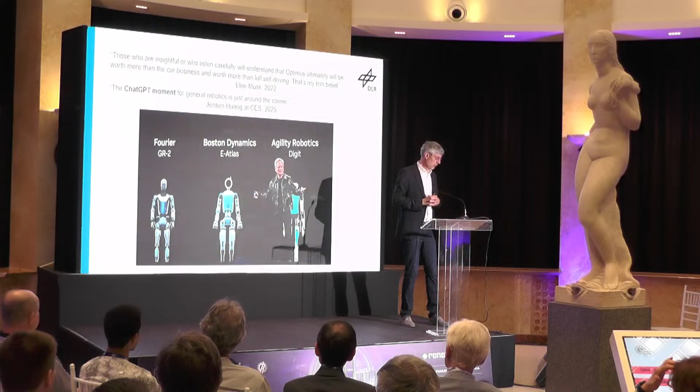And we all know it's much more difficult to act in the real world than acting on text from the internet. There are several citations, and probably the most important was Elon Musk's comment in 2022, where he said that, in principle, with humanoid robotics, Tesla will make more money than with cars and with autonomous driving. Now you could ask, is it a way of sustaining stock exchange value, which is overrated for a company, or does he really believe it? But he did make big changes.

Or the ChatGPT moment is coming. Some people talk about an iPhone moment. So what they are talking about is that robotics is going to be ubiquitous, and as smartphones became a commodity for everyone in the early 2000s, these kinds of robots would come in a similar way. And we can imagine that this will be a bigger disruption than smartphones and a bigger disruption than ChatGPT, if the numbers they are talking about turn out to be true.

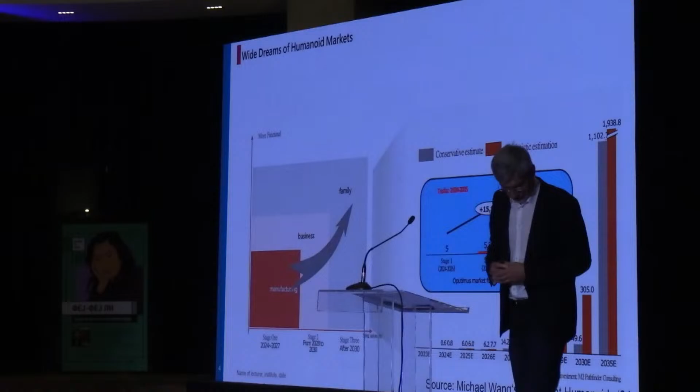This is a statistic again, these are two or three slides I have borrowed from Michael Wang's plenary on humanoids, because he has such a beautiful plenary about humanoids in China. But I don't know if you see it well, maybe I'm standing in the way, maybe I'll go to the side a little bit, but you see the forecast is, of course, overly optimistic.

They say we start with manufacturing, then go to business and family in the 30s. So it's like every one of us at home will have a humanoid robot in the 30s. We all know it's very optimistic. It's not true, to be honest, right?

And then they are talking about this kind of numbers. If I read them correctly, they are talking about selling 10 billion humanoid robots by 2035. I mean, it's a crazy number, right? But if journalists read that, they say, should I believe it or not? Is it true or not?

And they come and ask us, right? And of course, they are exaggerated, but on the other side, there's so much money in the system. I mean, after Elon Musk said something like that - he did reusable launches, all these satellites, he did PayPal, he did Tesla, establishing a market for electric and autonomous driving - and very often the Chinese just followed and did it cheaper, right?

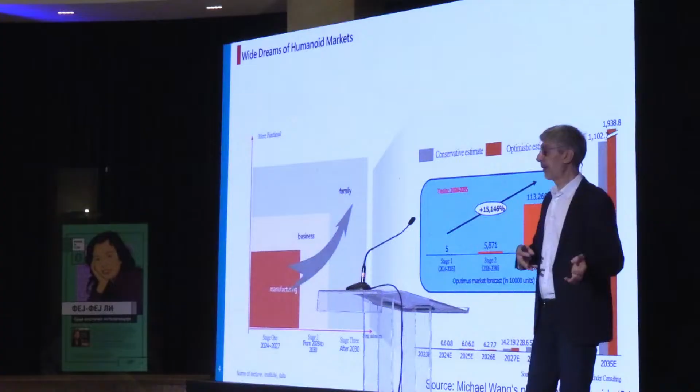And that's what the Chinese said this time: Okay, Elon Musk is going to do a mass market on humanoid robotics, we are going to follow and do it cheaper. And they have in China 4 areas where they announced to invest 140 billion euro just in humanoid robotics in the next 10 years.

I don't know if those numbers are true or exaggerated, but when you speak to Chinese colleagues, they say, if you know how to spell out humanoids and have a company, you can go to government and take millions of dollars for investing in humanoid robotics.

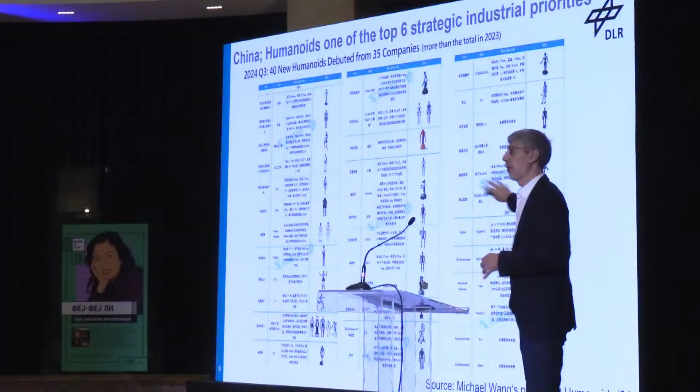And this led to more than 100 companies doing humanoid robots just in China. I think this number is already old, but at the time, beginning of the year, there were like 120, 130 companies doing humanoid robots with no market yet, right?

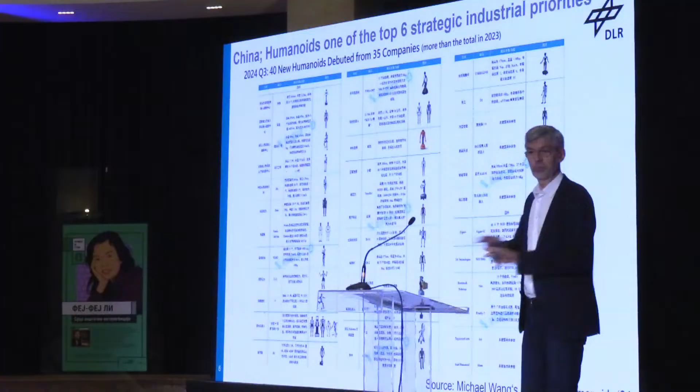Have you seen any humanoid robot in a factory? I haven't, right? But you have 130 companies with a lot of investment, and you have seen the YouTube videos, which are impressive. So what are we doing in Europe about that, right?

So robotics used to be - if you look at KUKA, ABB, FANUC - they sold maybe 30,000, 40,000 robots per year, which is still moderate for scaling, right? If you talk about 10 billion robots, even about 1 million robots per year, you have completely different production methodologies. We all know about smartphones, how integrated they are because they sell hundreds of millions per year.

So can we imagine a robotics industry exploding like this and going into the billions? This is what they are talking about, right? And what are we doing in Europe, right?

We don't have the private money of Elon Musk or American investors. We don't have the governmental support from China. We have small things, but still some things, right?

So Costa mentioned, I'm a coordinator of a network of robotics of which some of you are partners - colleagues from Ljubljana, IIT is part of it, several colleagues, right? So we try to put together 31 partners from some of the best labs, and then we have cascade funding, and I'm very happy that in the cascade funding we have all also Eastern European countries.

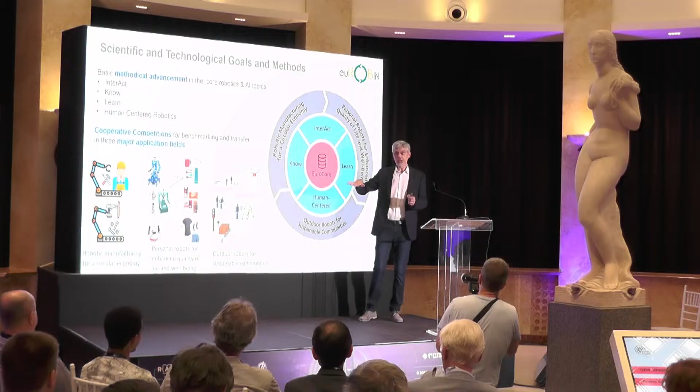And we said from a network of humans to a network of robots. So we have plenty of cool robots in Europe, but no lab is big enough to solve all the problems alone. So the mantra of this project is transferability, and we have also a lot of cascade funding projects. With this transferability, we hope to bring everyone further.

Every year we have some networks with interactions, plenaries like this one, but also the cooperative competition where we had about almost 200 people competing according to those rules. Last time it was in Nancy, and I can show you just some of the images.

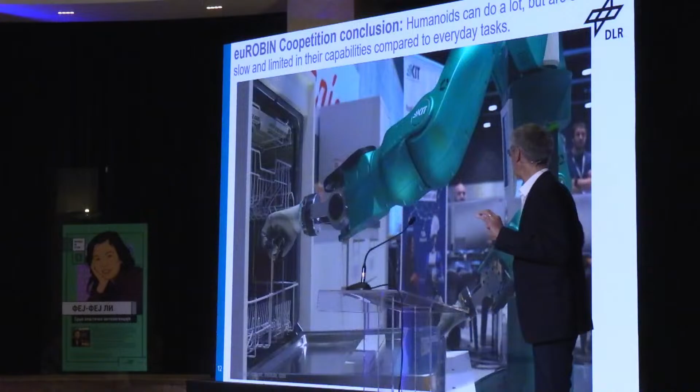So these were the challenges. And if people could not perform, they had a kind of a joker to simplify.

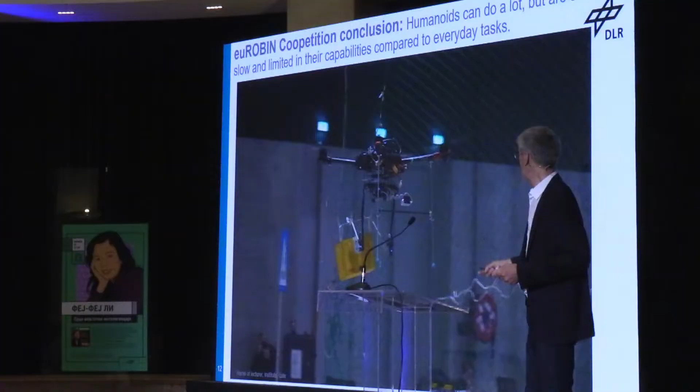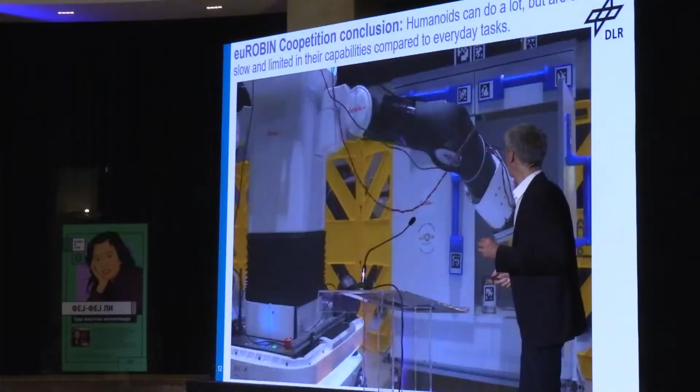You see driving systems from ATH. This is Sevilla with a flying drone and manipulation. I think you have seen before, this is the Centaur from IIT, from Nikos Tsagarakis - very different morphologies. This is the Tiago robot from Portugal and INRIA in France, and you see, still using sometimes markers for the vision. This is Alter Ego from Antonio Bicchi in Pisa, and so on.

So it's impressive, but we still saw that the robots are capable of doing a lot of things, but they are still slow, and they are still doing a lot of errors and mistakes. So we reached some things, but the way, I think, is still very long.

Okay, now after this introduction, I will try to address some aspects about where I think we are, from our perspective at DLR, starting with hardware and control, then autonomy and AI, and then a little bit of applications.

Okay, so robot design - actually, maybe the first robot which was really impressive came from Japan, and they started at Honda maybe in the 90s already, and this was the Asimo robot. If you look at most of the robots today, they did not change too much. So Asimo was a rigid position-controlled robot with force torque sensor at the feet.

What we pushed forward was the torque-controlled robots. I will talk more about that. But there are also different designs - I know that Costa is looking into elastic robots, and I'm looking also into elastic robots.

Now there's a big change coming from China in quasi-direct drive robots. They are much more cheap because they have very cheap gearboxes, they don't have torque sensors, and they have impressive speed and torque. So there has been massive progress in actuation in the last years, obviously. But most of them are in the first 2 categories.

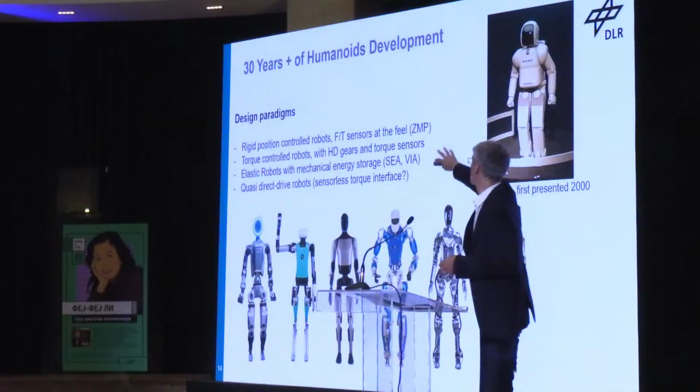And talking about zero moment point - no, first of all, I want to talk about something else. Why do I think that it won't be 3 to 5 years, but at least 10 to 15? I have this experience, Konstas mentioned that, of developing what we called cobots, lightweight robots. And I started as a PhD student after finishing my master degree close to here in Timișoara.

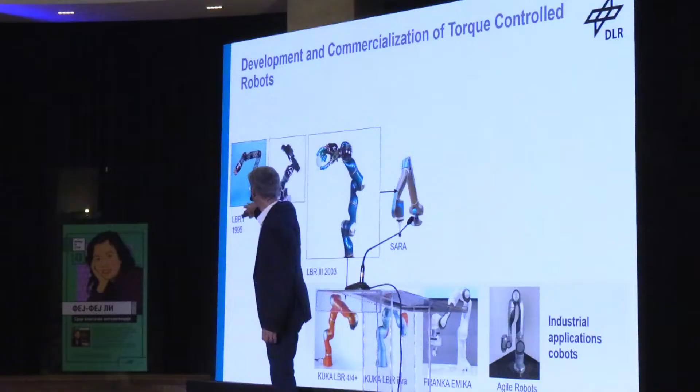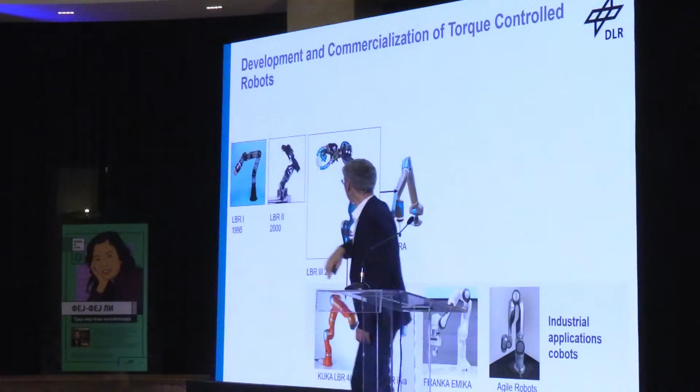I started here in '95 as a PhD student, and then we did about 8 years of research. So this is somewhere here I did my PhD. And then we had a robot where we thought, oh, it's a good prototype, we can license and commercialize it. And we licensed it to KUKA. It was around 2004, and then it took them about 5 years to do a serious product.

Until 2009, and then several robots came out of that - Franka Emika. I'm very happy to see Sven Parusel here, who has been, I don't know, about 8 years with DLR. And here now is the coordinator of research collaborations at Franka, Agile Robots, who bought Franka, and many others. So, this was a journey of maybe altogether 20 years until you get those in the market.

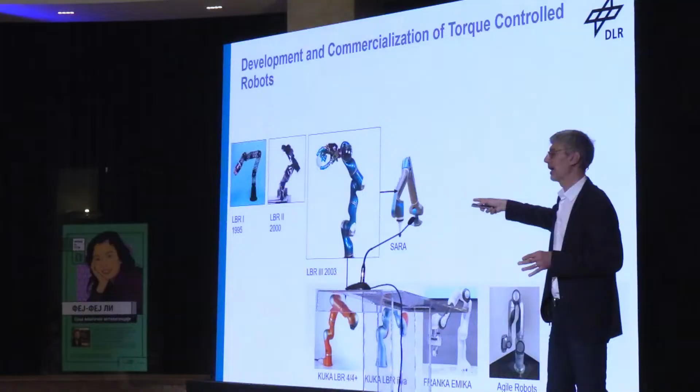Of course, the market was evolving slower - you did not have an Elon Musk putting money into that. But still, getting a nice prototype in the lab into a serious product takes you 5 to sometimes 10 years in robotics. That's the hard lesson we learned, right? When I graduated my PhD, I thought in 5 years everyone will buy those robots.

It took. Now we license this to medicine. We started now a company to do this in space robotics, and we use those joints from the KUKA robot actually to build our humanoids.

Because, you know, I learned that as soon as you have a good module for actuation, it's pretty easy to build more complex robots. If you did your homework on actuation, communication, low-level control, and so on, getting a humanoid out of the arm was a matter of 1.5 years.

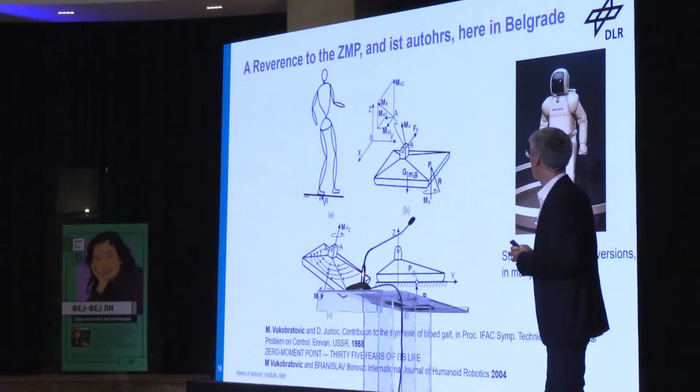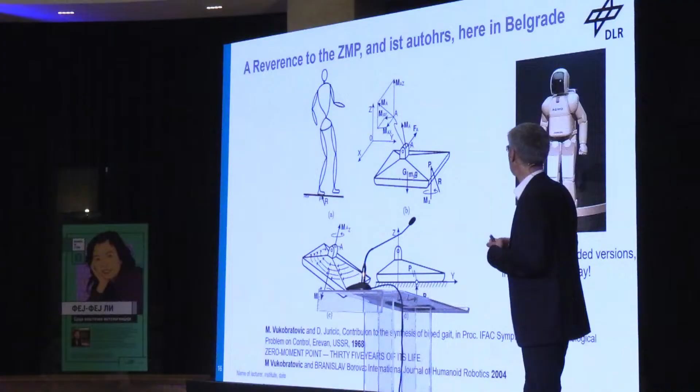Now, since we are here in Belgrade, I have to give reverence to one of the main contributions from the University of Belgrade, Vukobratović's work, 1968 - 57 years ago, I know it well because it was the year I was born. They defined the concept of zero moment point. Still, Asimo in 2006 and 2012 worked with zero moment point, and I think some robots still use it. We don't.

What we do instead is joint control, doing a coordinated control of the whole body. It was Christian Ott and colleagues at Humanoids 2011 from DLR who realized manipulation with the hand - moving an object - and balancing on legs are similar problems. You have parallel actuation and an object you'd like to manipulate, with unilateral constraints and a friction cone. Whether you manipulate an object or the ground is the object, the mechanics behind it are very similar. You'd like a controller in the object frame or body frame.

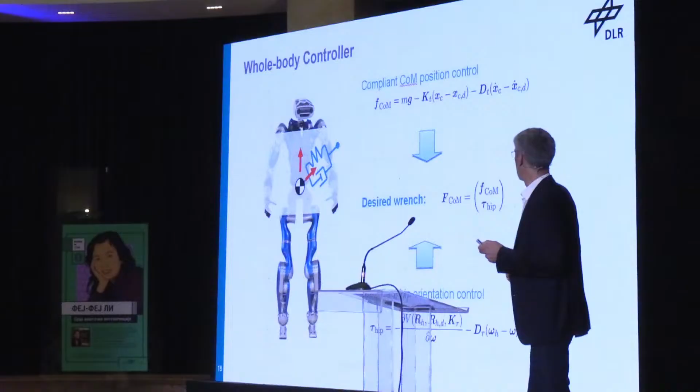For our robot, if it's just balancing, you have an impedance controller keeping your center of mass in a certain place with a spring and damper controller. That's the simplest thing, or you can give a trajectory to the center of mass. Then you define this spring and damper in those coordinates, you get a potential, and by differentiating this potential with respect to all the joints, you generate a rotation and translation controller.

Then you need to get this force distributed to the joints by pushing to the ground. On the ground you can only push, not pull, so you have friction constraints to consider. By constructing the Jacobian matrix and adding constraints that the forces need to be minimized and stay within the friction cone, you can solve this numerically - with current algorithms, within about 100 microseconds.

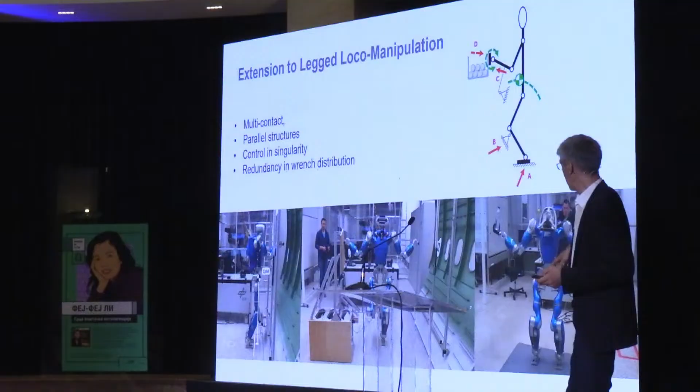These are results where the robot is just keeping the center of mass. It can also keep other coordinates, like the TCPs of the arm. You can move the entire body, and solve this multi-contact with a parallel structure - handling singularities, redundancy, and force distribution just using the torque interface and this optimization control framework.

Let's see. Oh, for some reason, could you click on the videos please? For some reason, okay, it just took a while, sorry. So what you see is...

Because you have a very fast control rate, the robot is even adapting for unknown terrain. The robot doesn't know it's balancing on this rocker - it's just trying to keep the center of mass in the given position. This force distribution optimization just optimizes every 100 microseconds for this balancing.

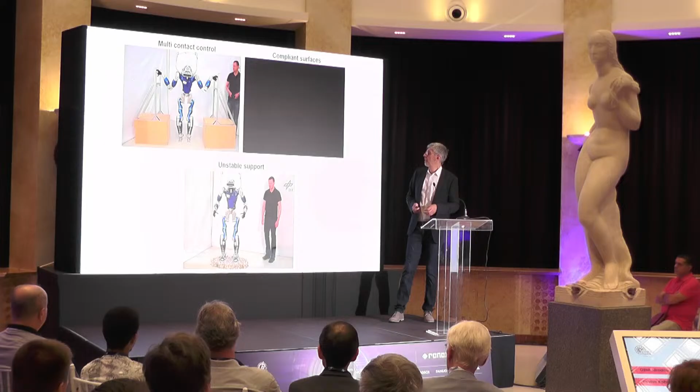Okay, let's move on. The good thing about this torque interface is that you can handle unknown environments. Like pushing this object - you define a frame for the center of mass, a frame for the arms and legs, and you can interact with the environment because we have this passivity-based framework which controls the energy of interaction. I don't have time to go into details, but if you know my research on passivity-based control, this is the framework we're using.

Now, what I've shown you so far is just controlling the center of mass. But when you start walking, you need to define trajectories for this center of mass. The difficult thing about biped locomotion is that bipeds are unstable - walking is kind of a continuous falling forward.

In terms of differential equations, this manifests in the fact that if you write down the equation of motion - you don't need to look at the details for the center of mass - but the point is you have two first-order differential equations: one is stable and one is unstable.

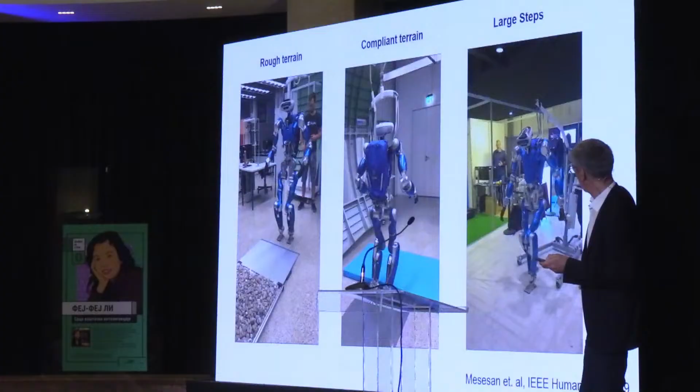And basically, I'm sorry, what's going on? Just a second. Yeah, probably I have.

Okay, maybe one slide is missing. But the main point is that...

You have two differential equations, a stable one and an unstable one, and the way of computing the desired trajectory is to integrate forward from some step planning for the stable part, and to integrate backwards in time for the unstable part. Given some trajectories for the foot planning, you can generate with analytic solutions trajectories for the center of mass.

And these additional points, actually the planning framework which we developed is, instead of working with differential equations like this, you define some auxiliary points. And maybe the most important point is this divergent component of motion.

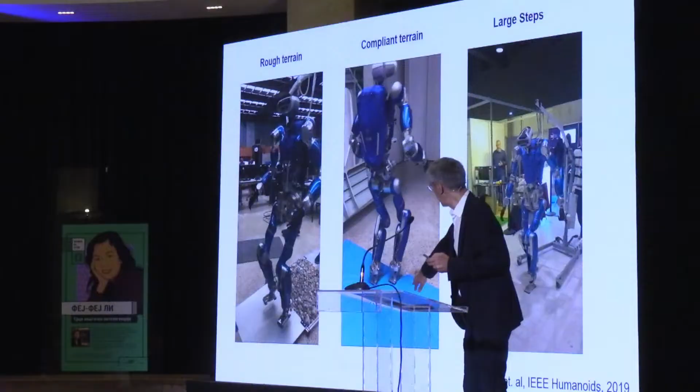You can walk on rocks, and the robot compensates for that. So you don't need to know exactly on what kind of terrain you are actually. Now...

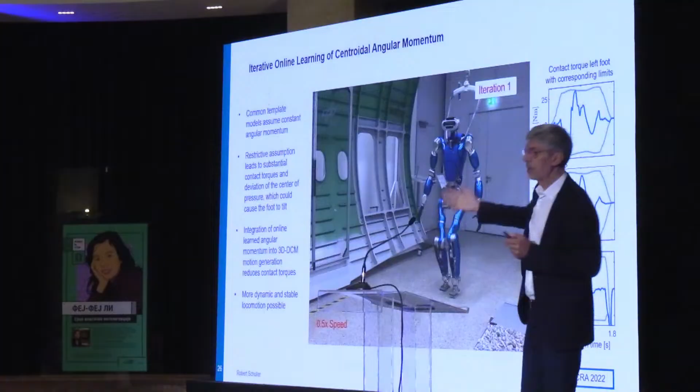People expect us to do learning, right? If you go to the conferences, if you are doing model-based control today, everyone says, oh, you are old style, right? You need to do learning. So I told my PhD students, you need to do learning. And but our conviction, at least I'm coming from a model-based world,

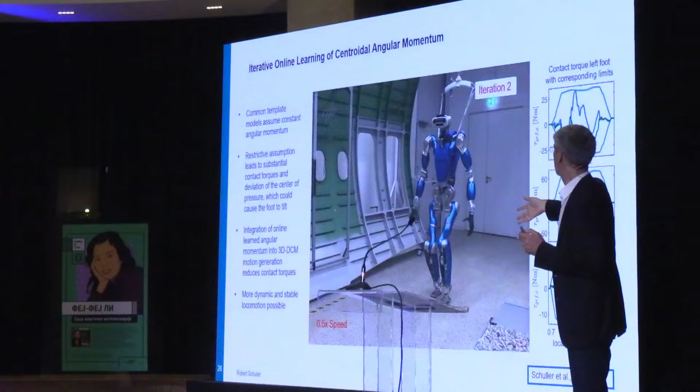is that it makes sense to do learning on top of that, instead of learning everything, the entire balancing and so on, because there are a lot of free parameters which you can adjust. For example, adjusting angular momentum such that you can increase speed, right? So we take this framework, and you still have a lot of space where you can plan these trajectories for the center of mass, for the virtual repelling point, and so on.

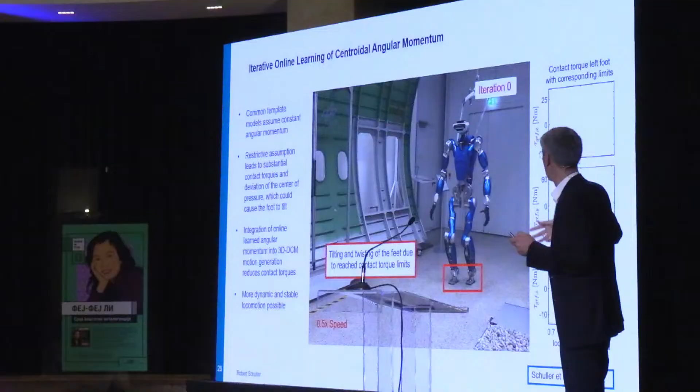And this is what we are learning, basically. And by learning, you can, of course, substantially increase the performance. But again, I'm pretty convinced that you can reduce the space in which you optimize by just taking a model-based approach.

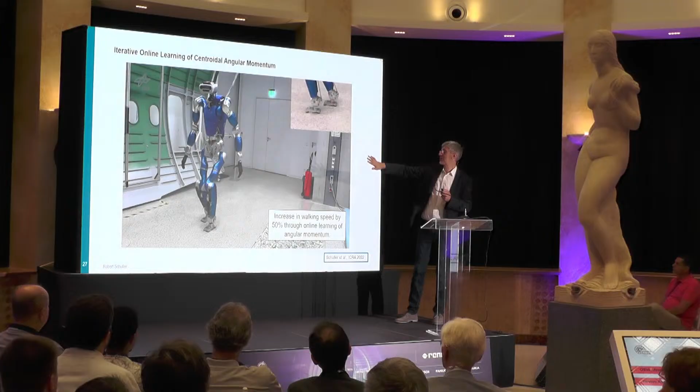And of course, you can increase walking speed. So I have to say that we cannot run, as you have seen in the Chinese videos, a half marathon. But this is mainly a limitation of the speed of those lightweight robot joints - they can just turn 180 degrees per second. So now we are preparing a new technology where you can increase the speed. But in principle, the control approach goes at the limits of what the hardware can currently do.

Now, of course, how do we handle - walking forward on a straight plane surface is one thing. How do we handle disturbances, right? And doing humanoid robotics is also looking at humans and understanding how do humans react to perturbations, for example. And humans have different ways of reacting, right?

The first reaction for small perturbations, you try to do it from the ankle. Then the next is a hip strategy, where you try to balance from the hip. Then if you have too much vibrations, you go down to the knees, and then you do a step backwards. And this everything can be put into a pretty nice framework, actually, with the formulation with the virtual repellent point I mentioned.

So in the first phase, you try to do ankle control. Then you go to the next phase with hip, and then you start doing with the arms and compensating for the angular momentum. But you see, there's still a very big space to explore, so you can use a lot of learning to become better in this area.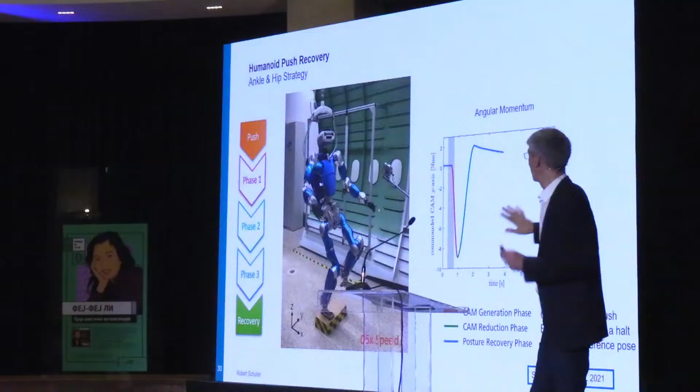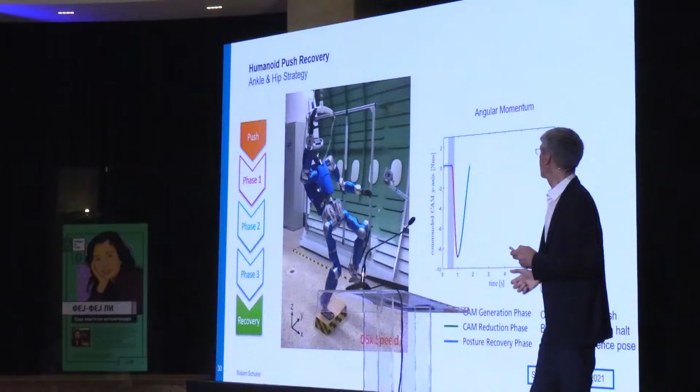But what you see here is still completely model-based, right? Compensating the angular momentum, the center of mass dynamics, and so on. And you can even go on one leg, and the robot can compensate until it reaches the velocity limits. Again, we have a limitation on the speeds, but I think model-based control can be very powerful and reactive, and putting machine learning on top makes things even better.

These are just some more examples. All this natural motion actually emerges from simple first principles, like stabilization of the center of mass, conservation of angular momentum, minimization of interaction forces, and keeping the friction cone constraint satisfied.

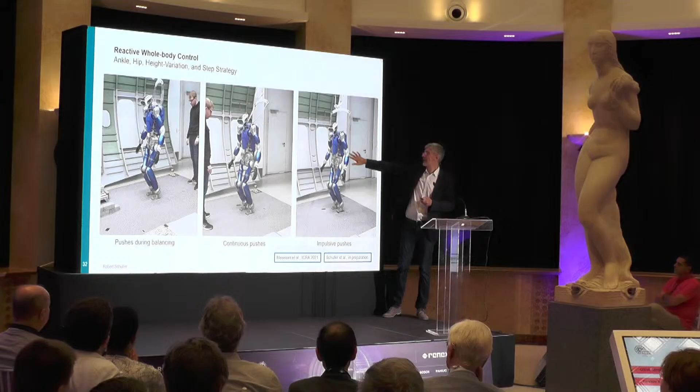Okay, now this is the robot working. This is Robert Schuller, one of my PhD students. One thing is you can really interact with the robot. This is a lightweight robot with torque control. If you look at the Boston Dynamics former Atlas robot, they had to push from the distance. We also pushed at the beginning from the distance. But actually, it's a robot which is compliant, like the cobots are, and you can directly interact with it, right?

Okay, now this can be extended also to running on uneven terrain. Unfortunately, we cannot run with our robot, as I said, because we have some velocity limitations. But the framework, this is a pretty precise simulation.

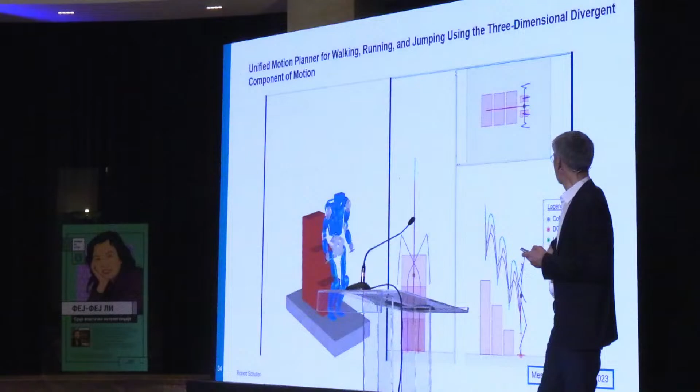Using this concept of center of mass, divergent component of motion, virtual repellent point, you can also program things like running, and... just a second.

Video is very slow, I'm afraid. Could you maybe help me by clicking on the video? Oh yeah, thank you.

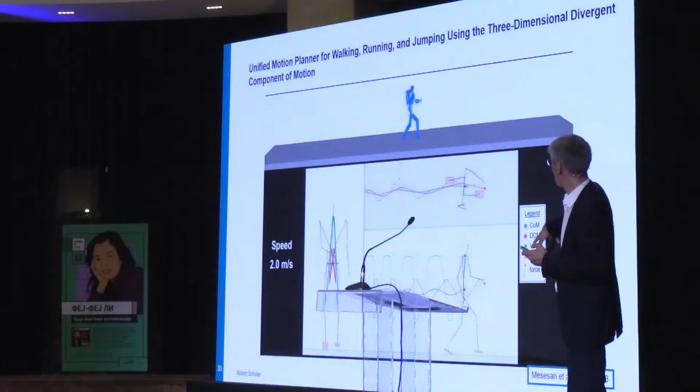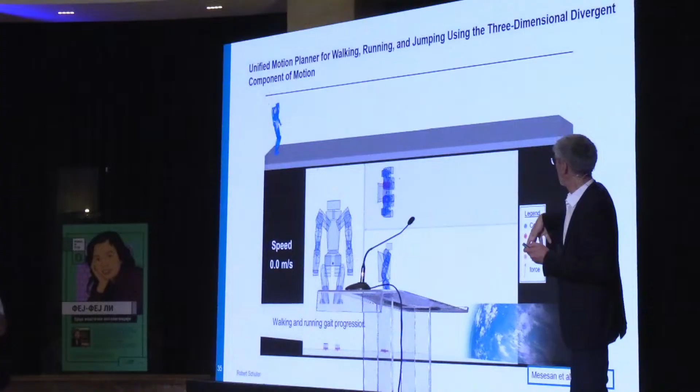So you see the only thing you need to plan are the footsteps. And then this algorithm automatically integrates, generates the trajectories of the points I mentioned. And then you can generate a transition from walking to running, and then back to walking. And then even you can, maybe I'll jump over that, you can even vary the trajectories, run in circles. And this is always solved online at a millisecond planning level.

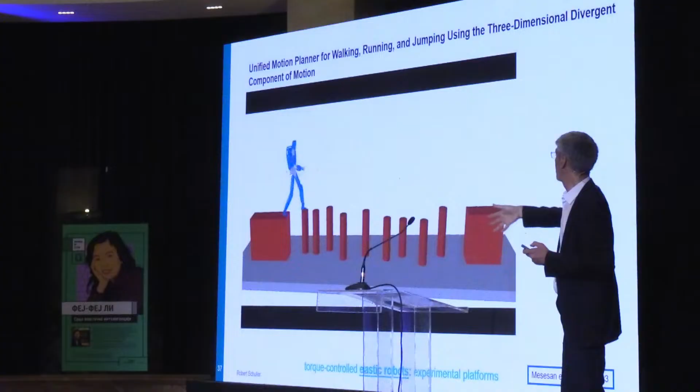We are building now a robot and hope that we can demonstrate this in real life. We also bought one of the Chinese robots, which do not have these limitations, but they don't have torque interfaces. So all these model-based approaches do not apply so well on quasi-direct drive robots, because they have a lot of friction in the joints. So there's a serious limitation. The methods we have apply for torque interfaces very well.

Okay, now maybe I'll jump over that for sake of time, and just discuss learning and reinforcement learning. Because I've shown you, there's a lot of parameters you can place, for example, the places where you place your foot, the way the leg swings, the swinging of the arm, the placement of the center of mass in this environment. Everything can be learned either by black box optimization or by reinforcement learning, and this is what we are looking at, but on top of the model-based control.

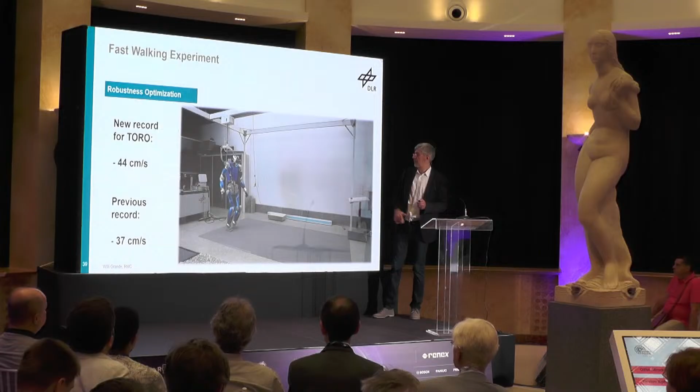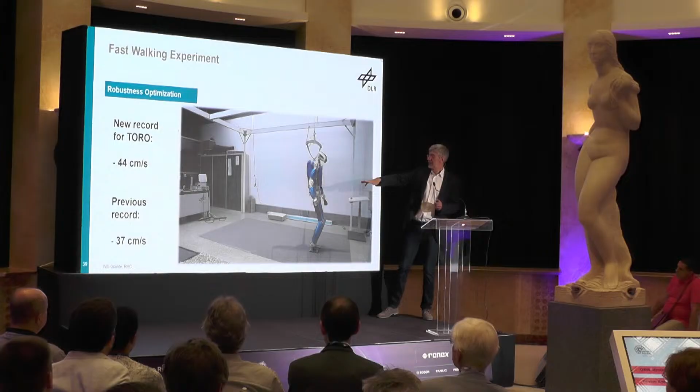This is some really very late result of a master's thesis, and this is really the maximum joint velocity this robot can do. So you go from 37 centimeters per second to 44 centimeters per second, which is the maximum our robot can do, by using reinforcement learning on top of the model-based approaches.

Okay, I'll stop here on that point and just summarize this control framework. Everything is based on controlling the interaction forces for the tip of the arms, for the legs. And then you have object compliance control for the hands. You have the center of mass compliance. You have a null space compliance, feed-forward terms, everything integrated into one framework. And then you can do manipulation and locomotion with the same system.

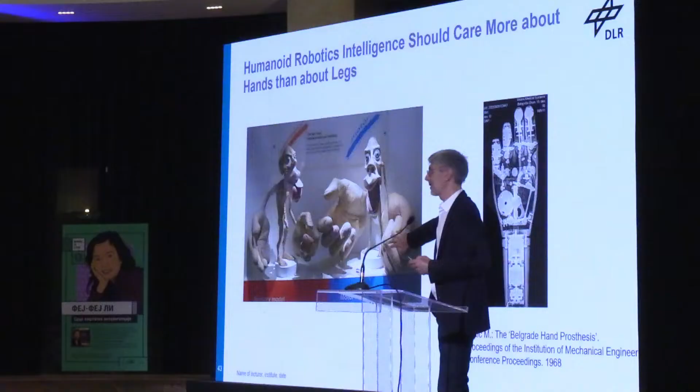And maybe I'll jump over that and come to the next point, which is about AI and autonomy. I talked to you a lot about legs so far, about humanoids. And actually, our people working on hands love to show this homunculus. This just replicates, scales the human body with respect to the sizes of the different cortex areas in the brain.

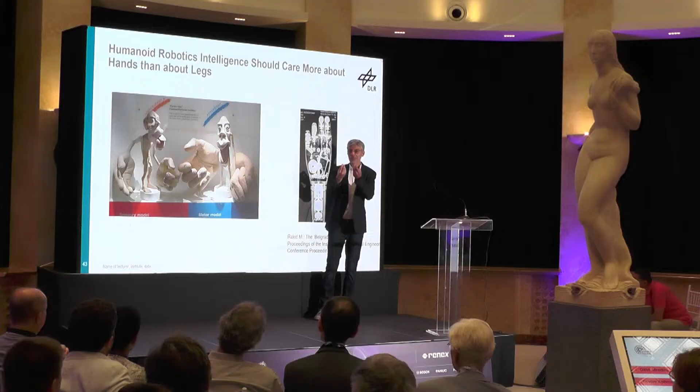So in our brain, in the motor cortex and the sensory cortex, the area for the hands is much, much bigger than the area for the legs, actually. For the hands and for the mouth, for the lips, for talking and so on. So obviously, looking at this, it looks like manipulation is much more complicated than locomotion. And people who are happy to show some humanoids running, they don't realize that if you want to go to the market and solve that, you need to solve the hands and you need to solve advanced manipulation.

And this is the second credit I would like to give to Belgrade University. Nicola showed me yesterday in the museum upstairs the first robotic hand, which also came from Belgrade. I found the paper, also from 1968. I think it's even older, but this is a quite often cited paper.

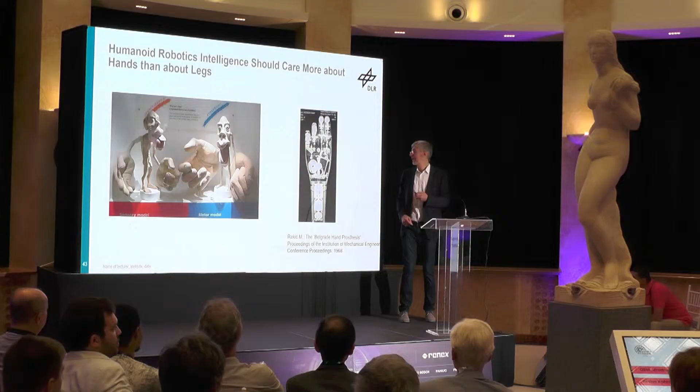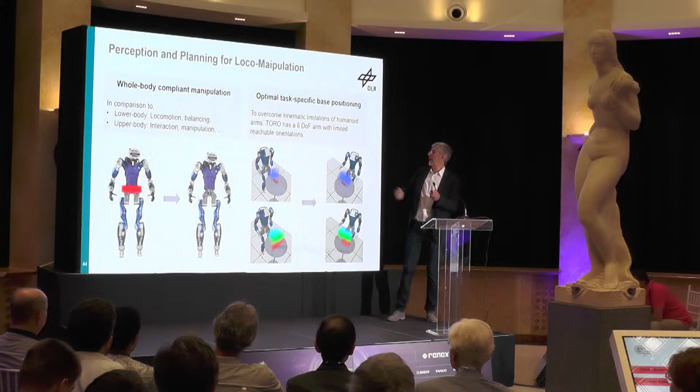Very impressive, right? And this is the next big thing we need to solve. Just at the beginning, a very classical approach: you need to plan your center of mass motion. First you localize objects on the table, then do some grasp planning and iterate over all possible grasps. You do the localization and then plan the entire motion to grasp the object. This was a very classical approach, but it shows the complexity of grasping and manipulation.

First we localized the objects and approximated them by spheres, cylinders, and cubes to easily generate grasps. Then you localize their center of mass, generate a lot of random possible grasps, eliminate occlusions, and out of the many possible grasps you can generate, you pick up some of them which can be executed.

Now we have this perception pipeline for this database. Maybe if you work on vision you know that. This is the YCB object database, from Yale, Carnegie Mellon, and Berkeley. There are about 40 to 50 objects from Walmart in the US, and they are considered a standard benchmark, so we can identify and localize those objects on a flat table.

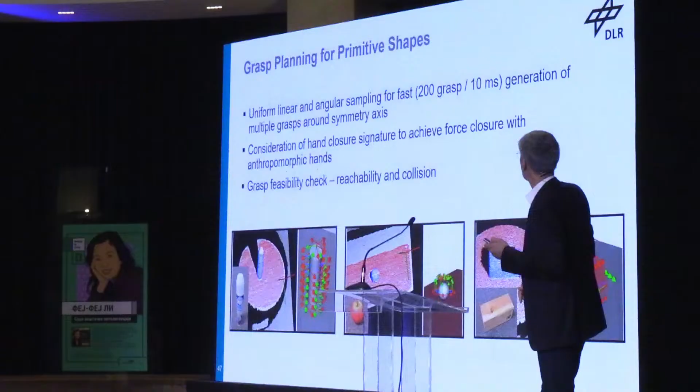After localizing the objects, the algorithm generates like 200 grasps. Those grasps had been generated beforehand because you have these object primitives, but you adapt those grasps to the localized object, then do a grasp feasibility check and select out of those 200 grasps the ones which can best be reached by the arm of the robot. Then you need to analyze the workspace for motion planning, to avoid singularities, using a capability map which tells you where the robot can reach the objects. So grasping and manipulation is a very complex pipeline.

And at the end you need to generate the locomotion to get there. Well, and this is the outcome. This is a demonstration in a project we had with Airbus maybe 4 or 5 years ago. We have these objects, you localize them on a table, the robot needs to move there, generates the grasp, and grasps the object. It's very simple, right?

If you show it to journalists, they say, oh, my 5-year-old kid can do that much faster than your robot. Yes, that's true, and we need to go faster, but after you explain what humans are solving, all the tasks we are solving in a sequence, maybe people get some respect for the performance of humans and of roboticists, that we really have a hard job to solve.

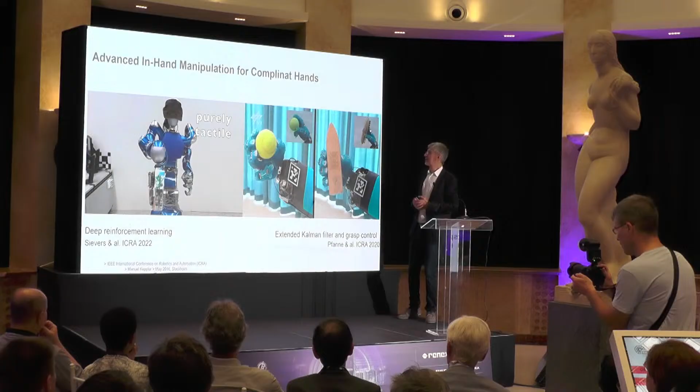Now, of course, this is very model-based. Then machine learning came and everybody said, oh, I don't need to learn homogeneous transformations anymore, I just feed it into my learning system, right? And they are good. So this is, for example, in-hand manipulation, and this is something fully trained from data. This is model-based. I still push my PhD students to do both.

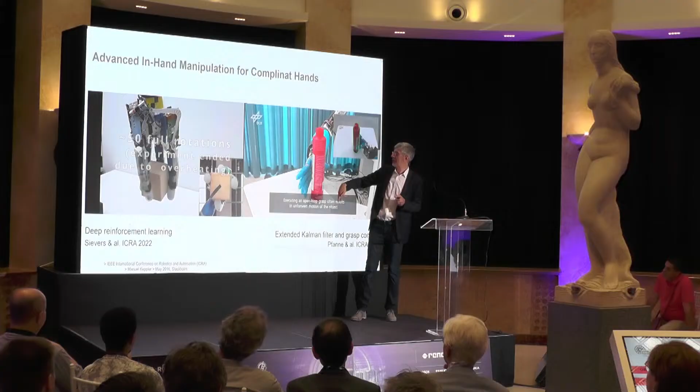You will see it can turn the cube for minutes without falling, based only on position sensing and internal force torque sensing. The way those motions were generated was purely in simulation, with pretty good friction models. And then it optimizes for 45K steps, 3 million steps. So you do a lot of parallel simulations with thousands of hands and thousands of cubes of different sizes and different friction, and after that you are able to turn the cube.

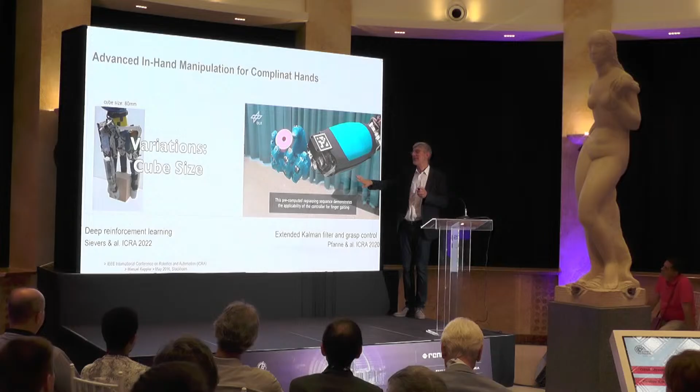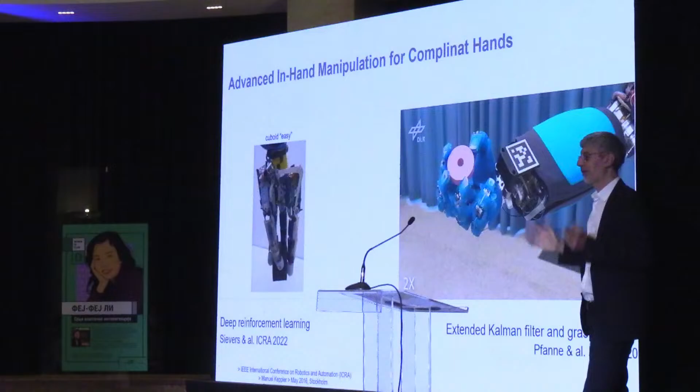I have a PhD student who did it also model-based with Kalman filtering, more classical, and it works as well. I tend to hope that having the model-based approach and putting machine learning on top is more promising in the long run, but I'm getting more and more isolated with this opinion in the community. Some people just think you need data and nothing else, use TensorFlow from Google and everything will be solved. Let's see, the future will show it.

But even solving these kinds of things is challenging. They train for a week just for manipulating cubes. Now they are able to manipulate different objects as well. Motion planning, of course, you can do the classical way, but you can also do motion planning by learning.

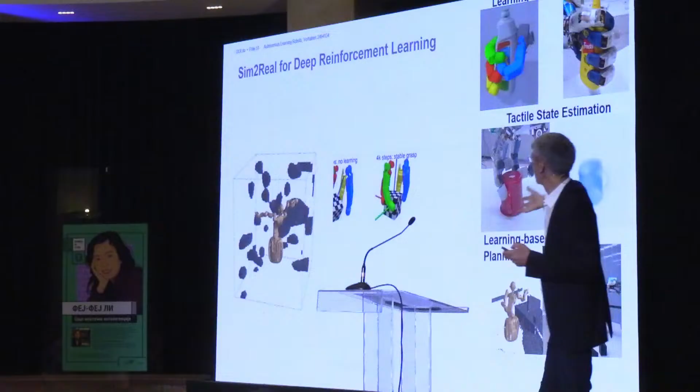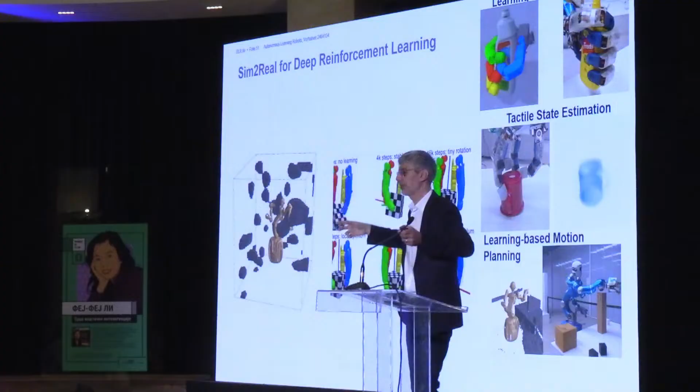It's a very high-dimensional space, so I still think there's a lot of model-based solutions to be given here. But what people do is generate random environments with random obstacles, and then massively train with GPUs. Don't care if you need an atomic power plant to get the energy to train that—you do it massively parallel in simulation, and then you get some good solutions.

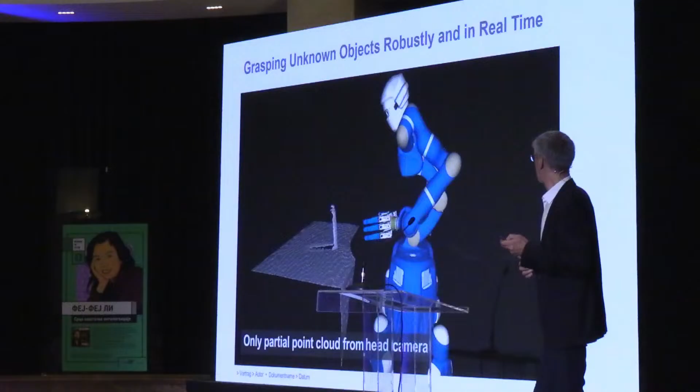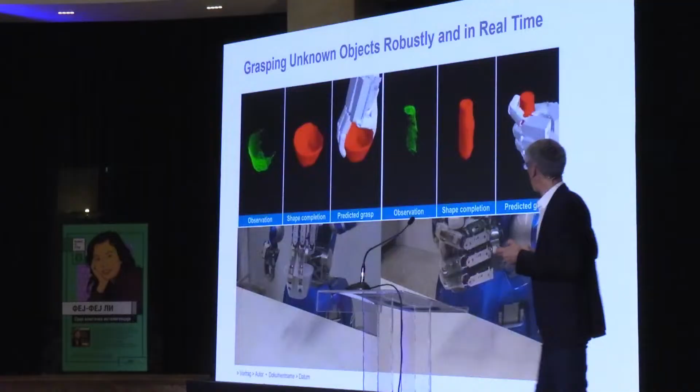Another example: there's a group, Berthold Bäuml's group, with a machine learning approach on grasping objects. You look with the camera and just see one side of the object, then you can complete the shape. How can you complete the shape of what you haven't seen? Of course, if you've seen millions of objects in simulation, you can imagine how it looks on the other side. After completing the shape, you generate a grasp, and this happens in one second, then the robot goes there and grasps the object, and it works really robustly.

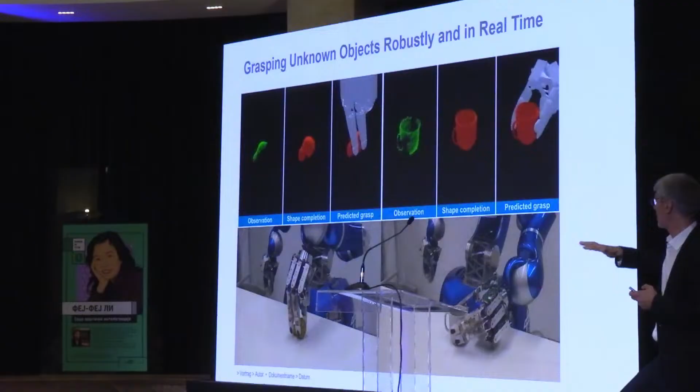If you have one object on a flat plane, you can go there and put your shoe, and the robot will grasp it, right? Those things work meanwhile pretty robustly from simulation. So: image, shape completion, grasp generation, grasp execution.

How do we train that? Because we have great virtual worlds. We have an open source simulator where you can generate random worlds, drop millions of objects on them, and then in these worlds you automatically get segmentation because you generated those objects. Then people train vision on that virtual data, and this virtual data is getting more and more precise, so the quality of object localization keeps improving.

So that's the pipeline we use for object detection. First you need to localize the object—to detect it, so just to say, I see two cups and one plate. But that's not enough, of course. In addition to detecting the objects, you need to localize the 6D pose, which is different from what people are doing on the internet—they just want to know if it's a Nike or Adidas t-shirt, or a cat or a dog, but we want to know, at precision of millimeters, where the objects are. That's the next aspect: pose estimation.

And then we do some local refinement by tracking the objects. Here you see a video of the robot unloading the dishwasher—still pretty slow, but first of all, we open the object on a feed-forward trajectory.

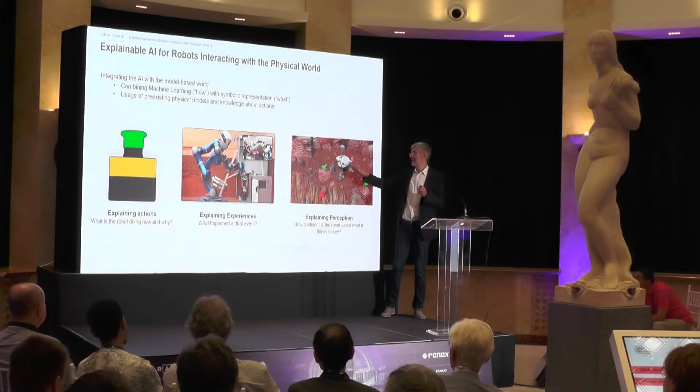Okay, I think I'll stop here and come to: what are we doing with large language models? Everyone is asking what we're doing with LLMs. We use them mainly for explanation, and I'll give you just a very small example.

What we think is that foundation models maybe explain this: our brain is not an end-to-end big network, but you have a perception cortex, a motor cortex, a world model, an action part, and so on. You have the brain stem where you have local control and so on. I still think that in the future, I don't believe the end-to-end approach is the one—I think we will have neural networks and foundation models for parts of this architecture.

Where we have been successful is using large language models to explain the state of the robot. Very often when you download a language model from the internet and ask it, do you see a coffee machine or a microwave—of course the language model can see it, but you don't know if the robot has actually recognized it.

If you connect the language model with the internal architecture of the robot, I would like the language model to say, I don't see the microwave, because the robot doesn't see it, even if I can see it. So you get informed about the internal state of the robot, because laymen have problems understanding what's going wrong. You need to check for singularities, for objects not detected, for being out of reach of the arm, and I would like the language model to explain the robot's state to people.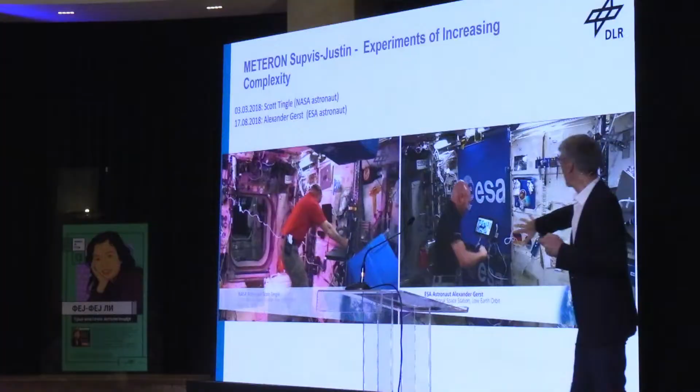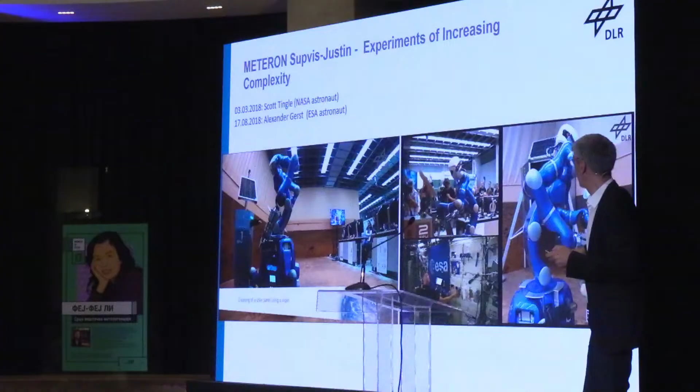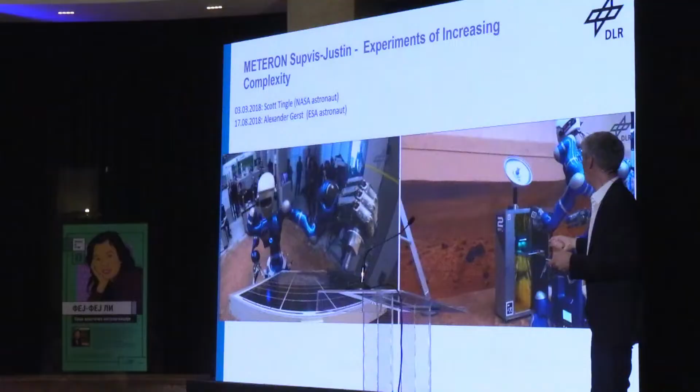What we are doing is, the astronauts are on the space station, and they are assumed to prepare a station on the Moon or on Mars, preparing everything for his landing. You have the robot down there preparing the solar panels, doing some maintenance, doing some repair. In some cases, smoke came out, and then they have to replace one of the elements. The astronauts can decide to use the humanoid either as teleoperation, where they go into the avatar and command the robot, or use its AI features.

Just some newest developments from the European Space Agency. The European Space Agency wanted to contribute to the American Artemis mission, but now Trump decided to stop the Artemis mission. So now Europe thinks about building its own humanoids, and they developed an AI-generated visualization. We took our robot Toro, and within 2 days went to our base floor and replicated at least some of the motions from the AI-generated video. The robot worked in a Moon environment, then took a cover and covered itself with a blanket. So I think the area I'm paid for — space exploration, robots, humanoid robots, but also rovers — can do a lot of big help.

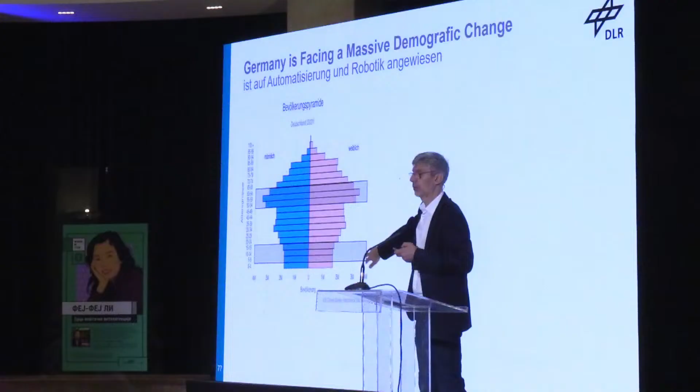But more than that, I think robots can help on Earth, and this is what we are expecting today. We are dreaming of having robots everywhere, helping in our homes. I don't know when this will happen, but we have a big demographic challenge. I don't know the situation in your country, but in Germany, these are the people who will retire in the next 10 to 15 years, and these are the people coming into the working area in that time. In Germany there's a delta of about up to 500,000 per year — we will be losing 500,000 people out of the 40 million who work in Germany every year.

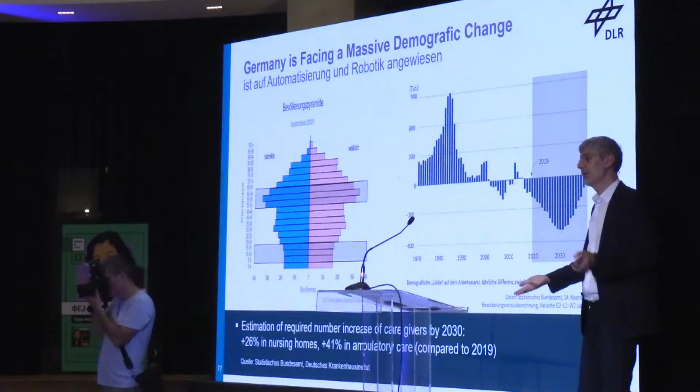Computed for Europe, it's the same; US is the same; even China is the same—we'll lose many million people. In the 80s and 90s we had population growth, now we have this decline. So especially in healthcare we have a big challenge, because there will be more elderly people and less people to give care. That's really a big challenge to address.

Our approach, of course, robots cannot solve the problems alone. But what we imagine is having a robot to help people at home. My mother still lives in Romania, I live in Munich, she lives alone. I would like to have such a robot where sometimes I can dive into the avatar and help her find her glasses on the floor, accessing the robot over a tablet interface like the astronauts did.

But when it's getting serious, you would like to have caregivers trained from the hospital or from the call center, who can be everywhere—not only in a hospital in your country, but maybe even from another country—diving into the avatar and helping people. So you use the AI when the AI works, and you rely on humans when the AI doesn't work, or if the humans want to interact.

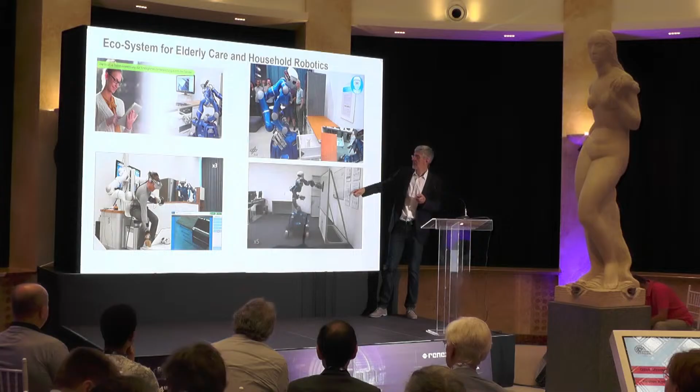Go and take me some drugs from a drawer, or do some cleaning. But when it's getting serious, if you would like to administer an injection, then you can dive into that avatar, move the arms, and the robot moves, and you see through the eyes of the robot in stereo. Then you can take an injection device and go to the human. This is a PhD student, and it's not a real injection device, but it's a proof of concept—you can give an injection within minutes.

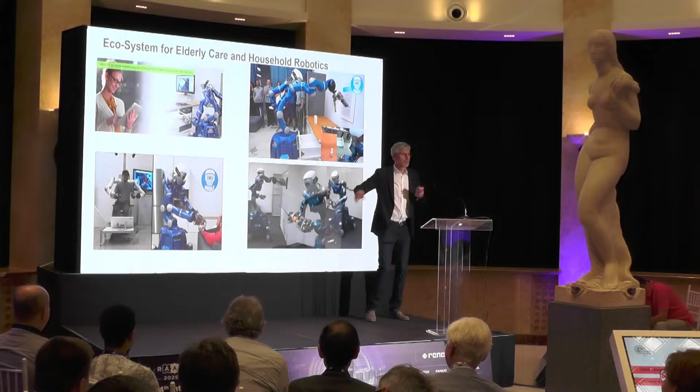That's the vision, but then you would like to have a human control that—you don't want the AI-based robot doing that. Altogether you can build a kind of ecosystem to address this.

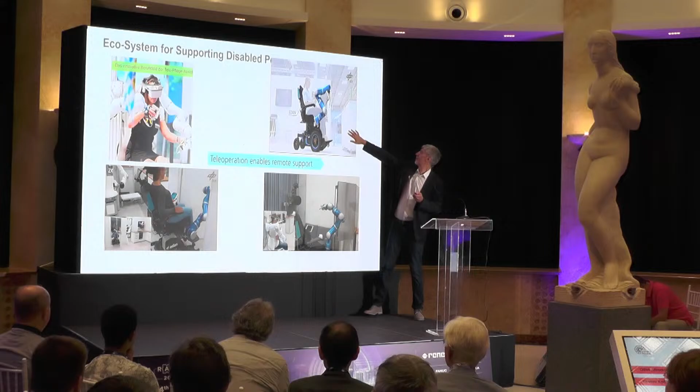People who need it even more are people with serious disabilities, and here you would like just to enhance the capability of the human. These are again our PhD students—you have a robot arm with a wheelchair and a muscle and neural interface, and the robot arm helps people like Stephen Hawking. They cannot move anymore, almost not at all, but with the aid of the robot they can live almost independently and do some things on their own.

One highlight for me was participating in the Cybathlon, a competition organized by ETH Zurich, held every four years. It's kind of an Olympic Games for people with disabilities.

This is Matthias Atzenhofer. He has a very serious muscle disability—he cannot stand up, cannot move his arm, but he can control a joystick. The competition at ETH Zurich was 10 minutes, 10 different household tasks, and we were the only team to solve all 10. Second place was a French team, which solved 9, and ETH also solved 9. It's because of the interaction of perception, control, and human manipulation—when he grasps an object, a camera detects it, and the control and AI help approach the object.

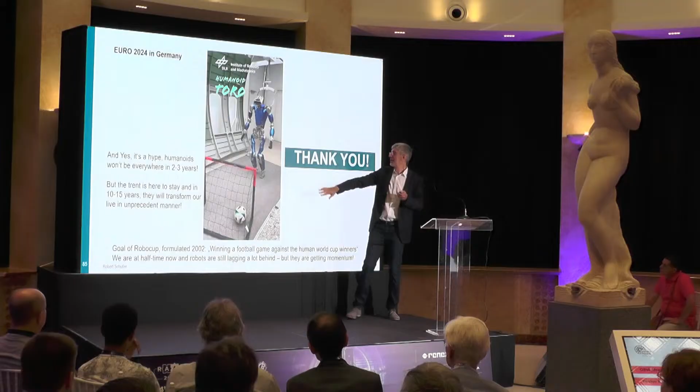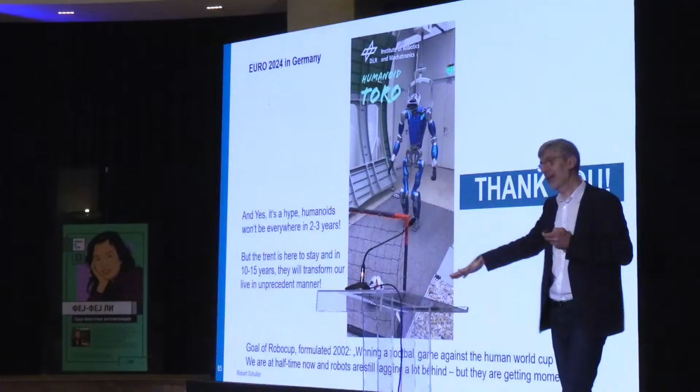And I will end by, around 2002, could you click again on the video please? Around 2002, the robot soccer community said by 2050 they would like to play football and win against the world champion. So we made this video last year when we had the European Championship in Europe. It's okay, it can shoot some goals far away from humans, but it's half-time, right? So who can say if in 25 years they will win or not?

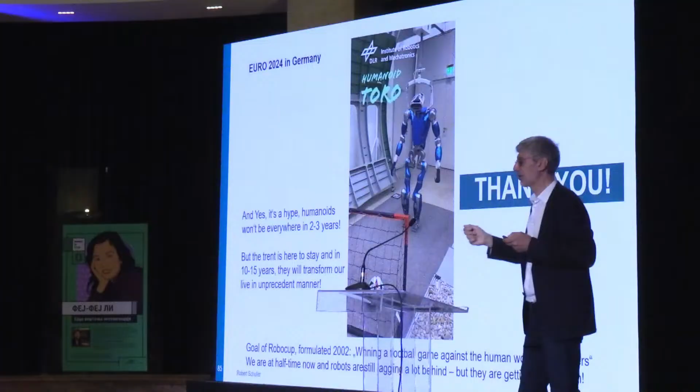People, it's serious. We need to do something in Europe. We need to be part of it. We should not leave it just to the US and China, but we need an industry, a strong industry on robotics in Europe. We have the scientists, we have the knowledge, but we need to scale up. And I'm worried that we might miss the scaling in Europe, because we move too slowly. So altogether, I think we need to push for that, and then I think we have a good future for robotics in Europe as well.

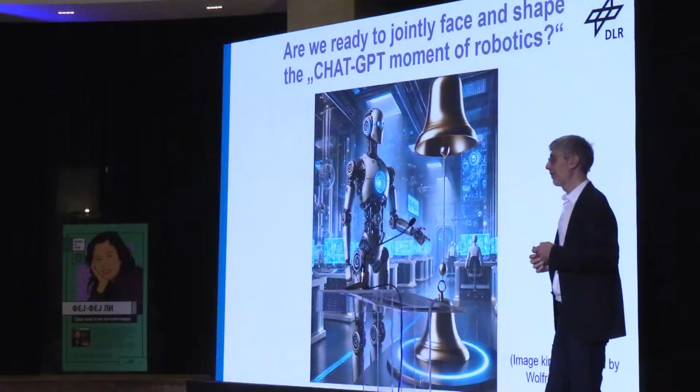Thank you very much for your attention.